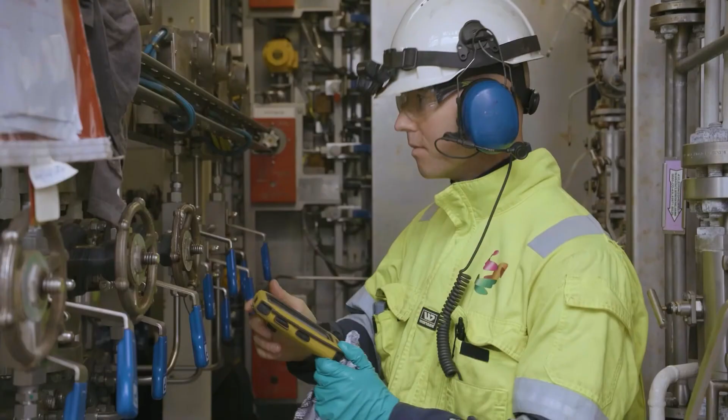In the meantime, let me introduce the topic of today's webinar. We will be discussing, and that's why I'm appropriately dressed here in the coolish Nordic climate, close to Arctic conditions on the Norwegian continental shelf. Today we're going to discuss how one goes from the depths of 4,000 meters into the cloud. Why are we doing this, and why are customers and partners doing this? It is all about making structural integrity analytics go to the next level through liberating data from extreme conditions and closed, siloed systems, so that we can drive genuine customer value at scale in the era of the cloud.

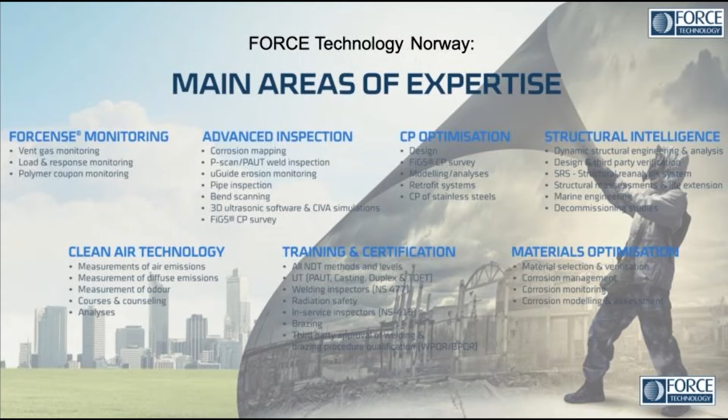But let's go deeper and see what we do in structural monitoring. The FORCENSE monitoring product range has two main product areas. To the right are the flexible riser products, consisting of vent gas monitoring and polymer coupon monitoring. With vent gas monitoring, we measure the pressure buildup in the annulus of the flexible risers and how this develops over time, allowing us to detect ongoing degradation and provide early warnings to avoid costly failures.

Polymer coupon monitoring is a more direct approach, where we insert physical samples of the liner materials into the hydrocarbon production fluid stream and measure the degradation of the polymer over time.

To the left is our load and response measurement solution, where we provide systems to measure and collect data from various sources such as strain, acceleration, waves, wind, and currents. Such data are highly relevant if you want to know how structures really behave and what loads they have actually seen. In particular, such data can be very valuable if you want to extend the lifespan of an installation beyond what it was originally designed for.

This is also very useful data to take back to the structural model and use to calibrate the model to more accurately represent the physical model, building the digital twin. By working with Cognite, we have now a simplified route to link the data and transfer the data up into the cloud in a safe and secure manner.

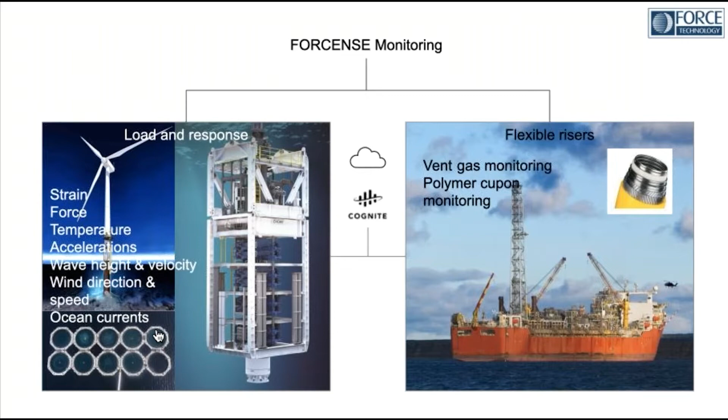And this allows us to focus on what we are really good at, and that is putting together sensor packages, battery solution, and electronics modules for data collection, in addition to using these data to improve our digital models for accurate modeling of the behavior. Let's look at some of the examples that we have been working on. Next slide, please. So Paul, I leave it over to you.

Thank you. The first example of a structural condition monitoring system is from the subsea drilling part, where we collect and process data from drilling operations, either looking at data that has to do with wellhead fatigue, loads going from the BOP down into the subsea wellhead, or on the BOP stack itself.

If we take the latter of these first, the BOP stack, this is illustrated to the right, where we have displayed sensors at two cross sections, typically in sets of 3 sensors, each with a sensor interface module, so that we can have redundancy. We have full redundancy. You could say we can measure moments in 3 of the sensors. We can combine the 3 and get better resolution. And these sensors measure typically micrometer precision, and we use isolated power and communication to ensure that we have a redundant system.

To the left, we have a typical BOP monitoring system. In this case, it's a cable system to the topside. We use the same subsea sensor integration unit, integrating motion reference units and typically either strain gauges or displacement sensors. So this is typically where we meet Cognite. There is a need for this information up and to share it onshore and offshore, and to have the data available for further processing. So if you go to the next slide, please.

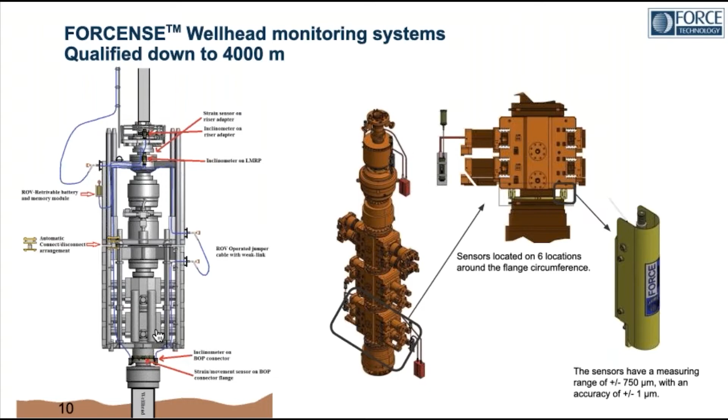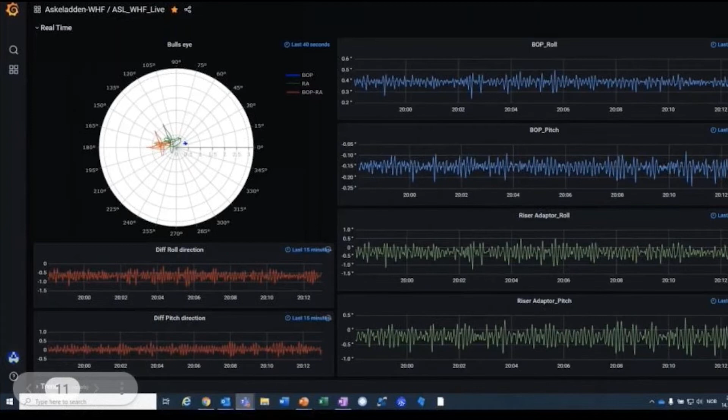So next slide, please. Hello, I'm Trond from Equinor. I work as lead subsea engineer in Equinor. We do planning and execution of offshore drilling operations. My first slide. I want to give some reflection from the end user perspective of how and what we use this monitoring system for on subsea wells. First, I want to show you how this setup looks.

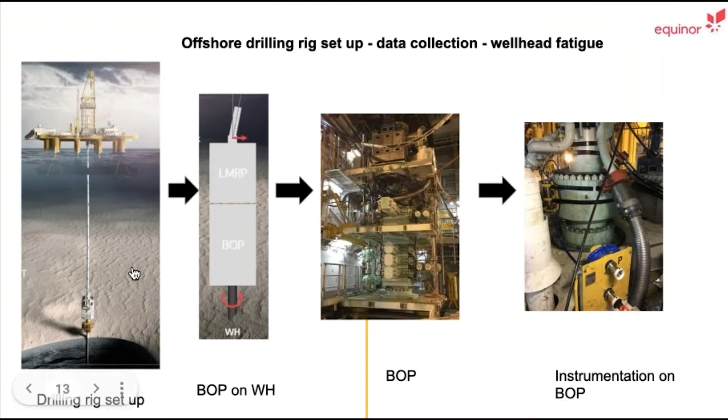Another crucial part of the wellhead is that it's an expensive part of a well slot if you're going to reuse it. For the business case, it's very important to reuse it. It's not the wellhead itself that costs so much, but it is the operation to change it out. So this is the thing, it's crucial with wellhead fatigue, and to replace it is costly.

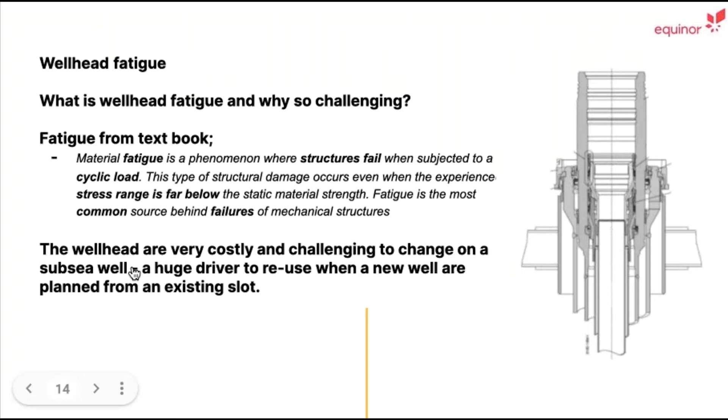So I'm going to try to elaborate a bit on some questions here and try to answer why we're using this and what the advantages are with data collection from subsea wellheads on a drilling rig. So what has triggered instrumenting of the BOP? That is what I've been talking a bit about here. It's the wellhead fatigue. That has been driving this, that we want real-time data down here, not just conservative analysis.

So why do we instrument the BOP and collect data? We can get real data measurement from the actual operation we are performing. We can also post-process or do analysis with real data. And it's also a tool for decision making. If we see something here, we have the data for better decision making.

And at the very end, what advantages have we got with this technology? We have more accurate analysis. We can actually base it on measurements. We can have continuous analysis running and redo the analysis as we are on the well. And eventually, it's also allowing more operation on well slots.

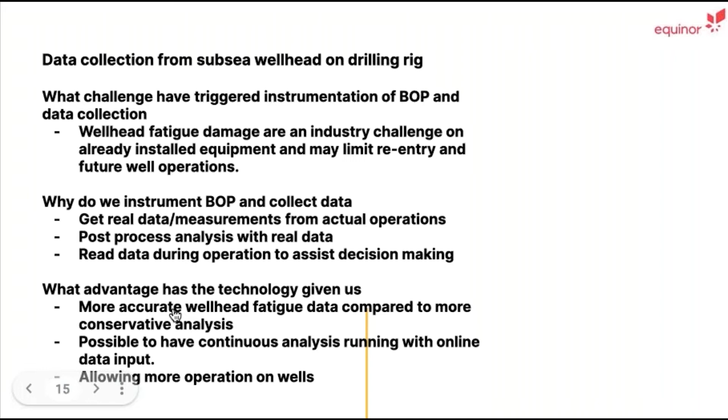Thank you. Then I give the word further. Thank you so much, Trond. That was excellent.

So moving on to some other examples. This is also from the oil and gas industry, where we have a sensor solution which we have just recently been working on. This is a replacement of a faulty load cell for a tension leg platform tendon. There are a number of aging platforms around the world, and this solution can help ensure the safety and integrity also after the original monitoring systems stop working, and you have life elongation of the platform system.

So here we have developed a bracelet solution that we can strap onto the tendon, and that provides accurate strain measurements for the tendon. In this particular case, we have 4 redundant sensors on each bracelet that measure the strain down to ±5 microstrain. And the system is installed by diver just below the pontoons as indicated in the figure.

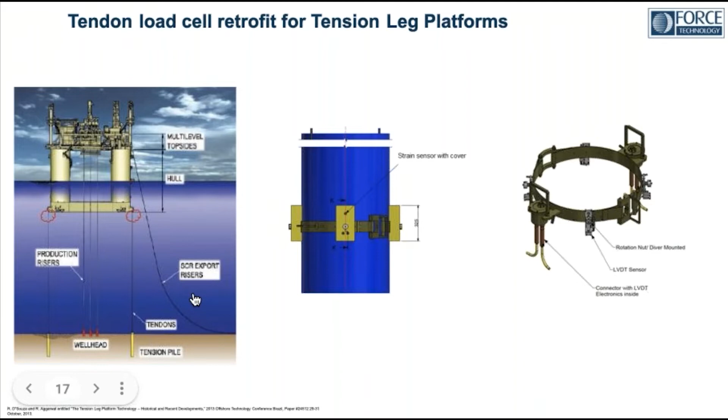If you go to the next one, Petteri, we can see the animation of the film from the installation. So here you see the bracelet installed subsea after the diver has done its operation, and it's in place. Anything to add on this one, Paul? No, I think it was a smooth installation, and it gives precise data and information.

We can move on to the next one, Petteri.

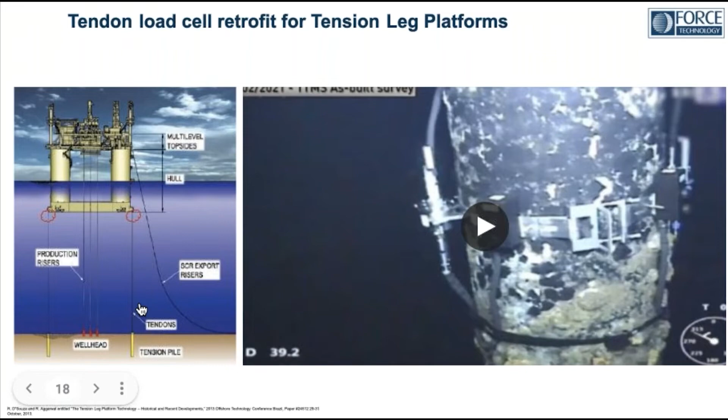So the next example is from a different business. This is aquaculture, where we have been involved in design of a closed cage system. And the task in hand for us at this time was actually to calibrate and verify the structural model of a fish farm built with these cages. And the cage is held up, floating by a concrete collar consisting of 8 elements.

And what we did was we instrumented both ends of this fish farm with sensors. The fish farm consists of 12 cages, so it actually spans approximately 70 by 200 meters. And the idea is then to see what happens with this when it's exposed to the environment, in this case waves. So we put sensors on the wires, measuring tension in the wire holding the collars together.

We put sensors, load cells, typically on the wires between the cages. We had mooring line tension on critical mooring lines. We had accelerometers on the pontoons to measure the movement on the different pontoons.

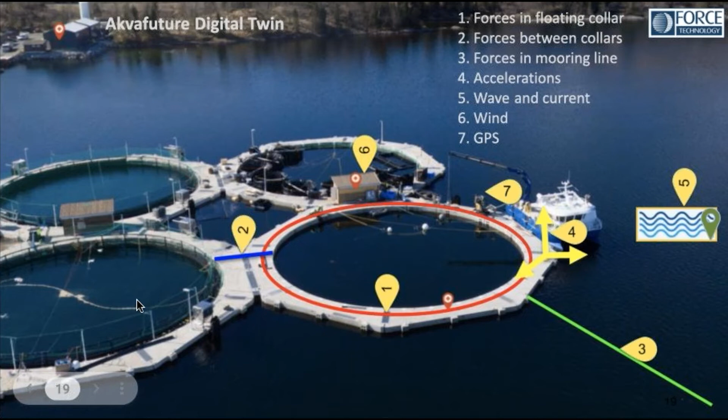Yeah, so here we can see how we have used the sensor data to feed back into the structural model. And we have used the sensor data to calibrate the structural model in order to make more precise simulations for the future. So basically we took out data from the mooring lines, as is shown here, basically the forces in the mooring lines. And we sort of recalibrated until we were able to capture the dynamic behavior of the whole model. And with that calibrated analysis model, we have a very good representation of the dynamic behavior.

That in turn leads to improved design. We saw, for instance, some improvements that would be made in the next generation. We also saw and learned that our initial structural models were too stiff in, for instance, the connection between the collars, among other things. And by improving those data, we were able to improve the whole behavior of the design. And also we found that the acceptable sea states for this facility were actually more robust than originally anticipated. So that was a very good learning. And also we do have a digital model to aid in future facilities.

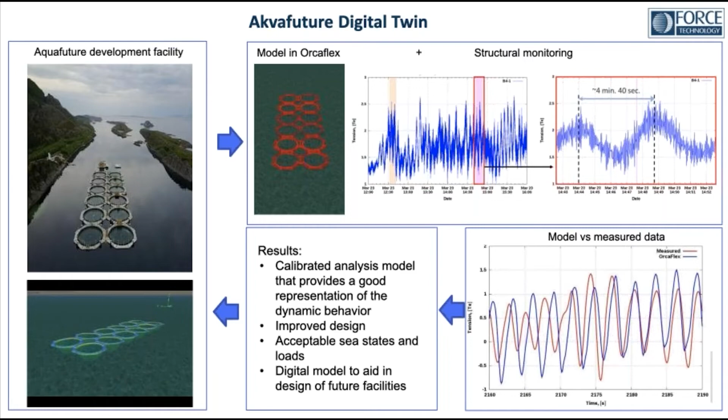Next slide, please. So moving on to what we do in offshore wind. As mentioned, we do a lot of structural design and analysis with structural integrity, third-party verification, advanced engineering, and design analysis. But most prominently, we design foundation structures, both for wind turbines and for trafo stations, these HVDC transformer stations that are used for these big new offshore wind farming facilities.

FORCENSE monitoring systems we have been through, basically the load monitoring part of what we do, but we also do corrosion monitoring in addition to the dynamic and mechanical monitoring that we have discussed. And we also do a lot of cathodic protection management and design for offshore wind. If you move on to the next one, Petteri.

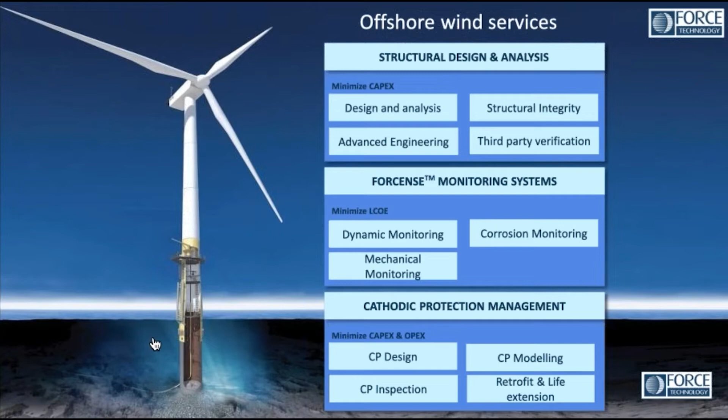So just want to say a few words on the capabilities we have on inspection. We also make these systems for scanning of blades for the wind industry. So this is from our mother company in Denmark, and I think we have at the moment the best solution for blade inspection during fabrication available on the market.

We also do drone inspection of blades and also thermal scanning, and we have crawlers that we send up on both the blades and the towers. And we also do coating and paint inspection, and also foundation inspection during fabrication, as mentioned. If you go to the next one.

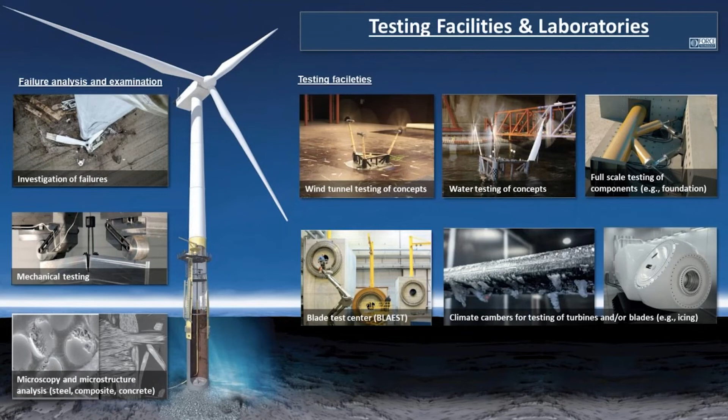So here is some of the stuff that we are doing in our testing facilities and laboratories. As mentioned earlier in the presentation, we have wind tunnel testing and we have water testing. And what you see in the top pictures there is a combined wind and water testing of a floating wind turbine design that we actually made 10 years ago. Way ahead of its time, but a really great project.

What you see to the top right is a full-scale testing of a jacket node. And to the bottom left, you can see the testing facility that we use for full-scale testing of windmill blades. And we also have climate chambers for testing of turbines and blades. In addition, we do failure investigation, mechanical testing, and also microscopy and microstructure analysis of steel, composite, and concrete.